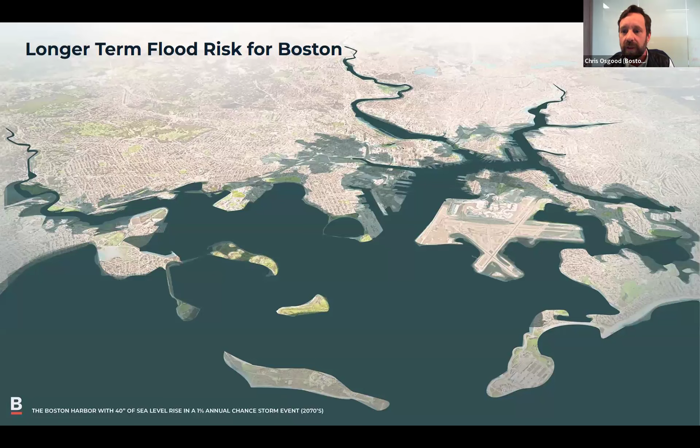As we are collectively doing this work to reduce the risk of coastal flooding, we are very focused not just on walling ourselves off from the community, which is what we do not want to do. We want to reduce that risk, but really think about how we continue to enhance public access to that shoreline, how we make sure that this wonderful shared asset of our harbor is something we can continue to bring people even closer to as we reduce the risk of coastal flooding in the future. And as we build along that coastline, we are not just enhancing public access, but also making sure we're continuing to invest in the ecology of the harbor itself. It's that triple bottom line around reducing risk, improving public access, and improving the ecology of Boston which is really the focus of our work.

That work is really done with three different strategies that are happening at the same time, but have different timelines associated with them.

The first is really focused on today's storms. We want to make sure that we, as a city, are protecting and supporting our residents around preparedness for all hazards, including around coastal flooding. This is work which is really being led by our Office of Emergency Management. We last year hired a new chief of the Office of Emergency Management, Adrian Jordan, with an expanded focus much more on the climate hazards in front of us.

This past September, with credit to Nayeli and the Office of Emergency Management, we ran what we believe was a first-in-the-nation Deployables Day, a one-day training event for the folks who have deployable flood walls to put them up in advance of the winter season, which is when we typically have seen our most extreme coastal flooding events here in Boston. We are now looking at other interim flood measures in our city as we do some of the longer-term changes to our coastline.

The Office of Emergency Management will be updating its natural hazard mitigation plan over the course of this year, and there'll be a number of public conversations about that. We encourage you to get involved in that process. Most of what I'm going to be talking about in the next couple of slides, though, really focuses on the second and third strategies you see on this screen.

These are the strategies focused on the transformation of Boston's shoreline to lower longer-term flood risk here in our city. The first set of work is really focused on the places where we are experiencing flooding today, where we would expect to see significant flooding later in this decade or early in the 2030s. This is a place where the mayor has invested more of the city's capital budget than at any other time in Boston's history, in work to enhance that coastline and protect Boston residents. I'll go through some of what those projects are.

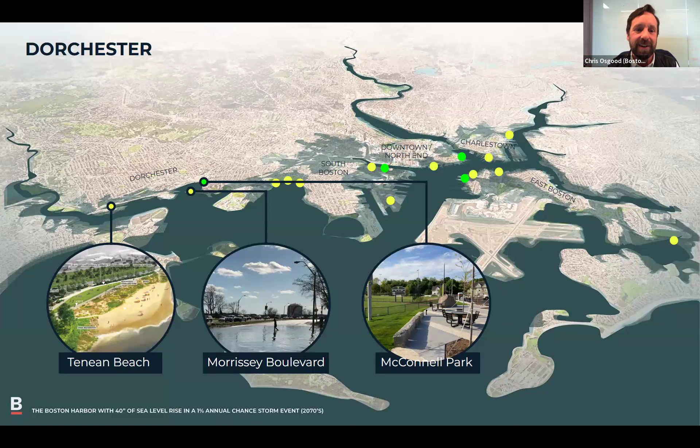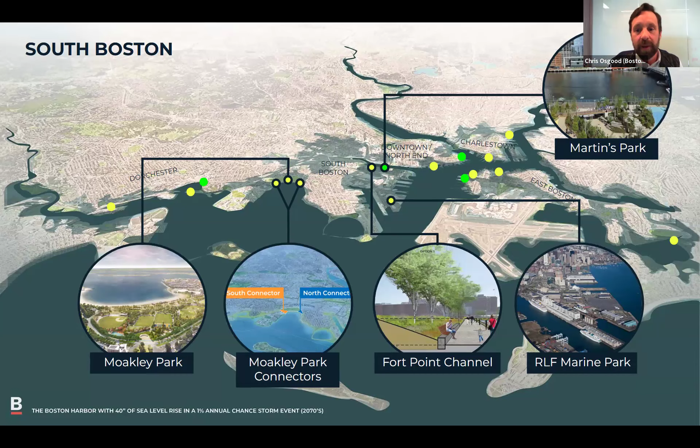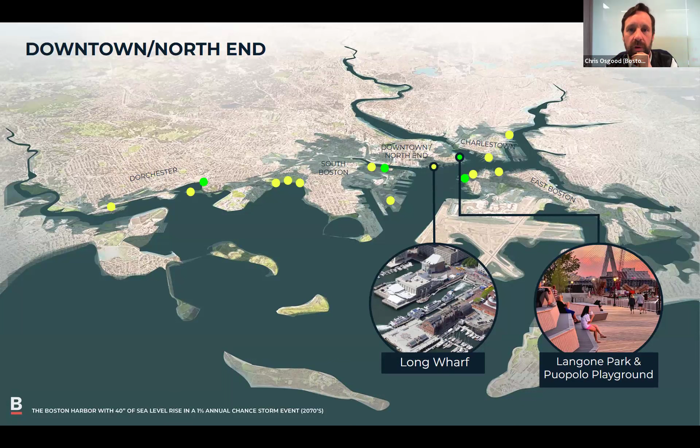That terrace seating is a beautiful place to sit on any sunny day, and it also serves, in particular on stormy days, as flood resilience protection for the North End neighborhood. Mike, Sarah and Rob will talk more about the project just around the corner, around the New Charles River Dam, a really critical project for the city, the Commonwealth, and every stakeholder across this region.

Moving quickly to Charlestown, the city of Boston is shortly kicking off, through its planning department, an advanced study around the Charlestown Navy Yard. This is the area adjacent to the National Park Service site, where we are working with property owners there and along the Little Mystic Channel to think about what district-scale solutions might look like, solutions that will help reduce the likelihood of inland flooding in the city of Boston, as well as guidance around retrofits to some buildings where that may be appropriate.

The second project focused here is one that broke ground in December: a $25 million reconstruction of Ryan Playground, a beautiful playground at the northern end of Charlestown. This is one of two parcels where the city needs to do work to close a significant flood path that, left unaddressed, would allow flooding into the Sullivan Square area and into parts of Somerville and Cambridge. We've been very excited to move this project forward with support through the city's budget.

Just to close out our quick run-through of some ongoing work the city is doing in East Boston, with credit to Massport: Piers Park 2 was recently completed, providing a degree of elevation in connection with Piers Park 1 that helps address some near-term and long-term flood risks there.

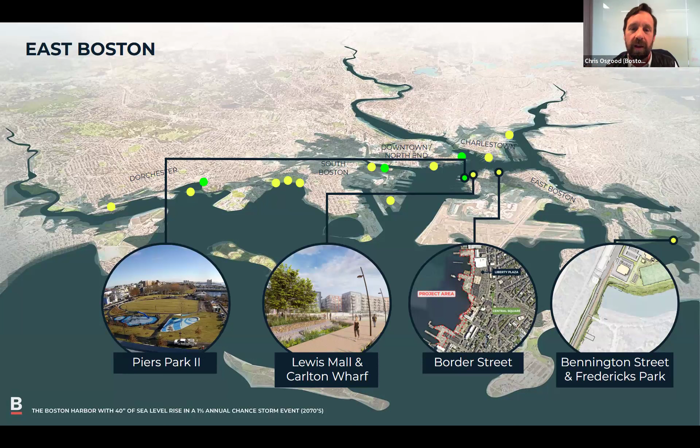The third project is at Bennington Street and Fredericks Park, which we're doing in collaboration with Revere. Across those last three projects, you get a sense of the nature of these projects and, to some degree, the complexity of each. Looking at Bennington Street, Border Street, and Lewis Mall/Carlton Wharf, all three are in East Boston, all protecting very critical residential, commercial, and infrastructure assets. But they need to be done in slightly different ways.

The project at Bennington Street and Fredericks Park has a flood path that cuts across both Boston and Revere. So this project is being done in coordination between those two cities, with the support of a pair of Municipal Vulnerability Preparedness grants from the Commonwealth.

Border Street is a project being done across 7 private property owners, where the city of Boston is stepping in and leading a coordinated planning effort across those property owners, even though there is no public land in this area, to make sure we are designing and implementing a resilience strategy that protects not only those properties, but all the properties behind them from the flood risk in front of us. Lewis Mall and Carlton Wharf is a project being done in collaboration between the city of Boston and Massport. Three projects, three different partnerships necessary to move them forward.

The context for these projects is also very different. The Bennington Street project is right adjacent to DCR's Belle Isle Marsh, one of the beautiful salt marshes in Greater Boston Harbor. The Border Street project is happening within a designated port area, and Lewis Mall and Carlton Wharf is a project really focused on the existing harbor walk.

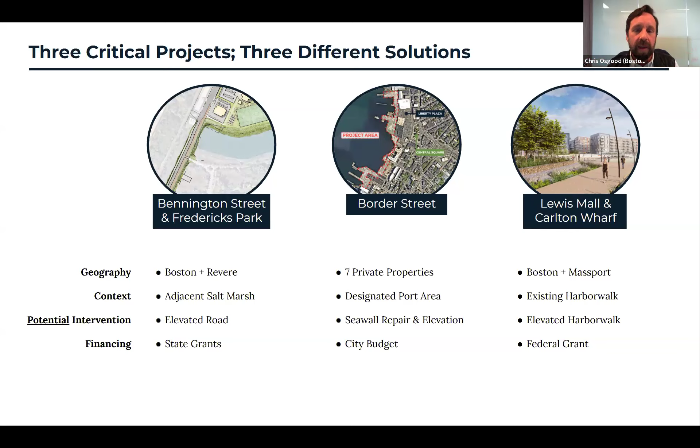And then the financing for each of these projects is also quite different. Bennington Street and Fredericks Park has been advanced through state grants, Border Street through city funding, and Lewis Mall and Carlton Wharf through a combination of funding, but most recently with the federal grant we've received. I wanted to give a sense of this complexity because it speaks to the nature of the collaboration that is already happening and that's going to be necessary to make all of this work move forward here in Boston and across the Commonwealth.

Before turning it over to Rebecca and then over to Mike and Julie, I wanted to briefly touch on one last thing: the U.S. Army Corps process in front of us. The U.S. Army Corps is one of the most significant federal partners we have in addressing some of the long-term flood risks that Boston experiences. The way you formally partner with the U.S. Army Corps of Engineers is through a coastal storm risk management study.

That study culminates in the spring of 2028 with a report submitted to Congress. In that report are a set of recommended design interventions, recommended capital projects to lower the flood risk for our city. The first versions of those projects are going to be publicly presented over the course of this year.

So in thinking about ways this broader group can stay engaged in this process, particularly in the Army Corps work as well as each of the projects I highlighted, is a really important next step. To plug into the work along the Army Corps and into our nearer-term capital projects, I encourage people to go visit boston.gov/climate resilience. I can put that information in the chat. You can find out more about each of these projects and about how to get engaged.

We know that we're going to be able to address the risk in front of us through the collaboration present on this call, whether it is around getting the designs right, thinking about how to do the financing, or making sure we are not just designing great projects, but building and maintaining them for the success of our city and region for generations to come. So I look forward to your questions, the additional presentations, and thank you so much for everybody's focus on this really critical effort.

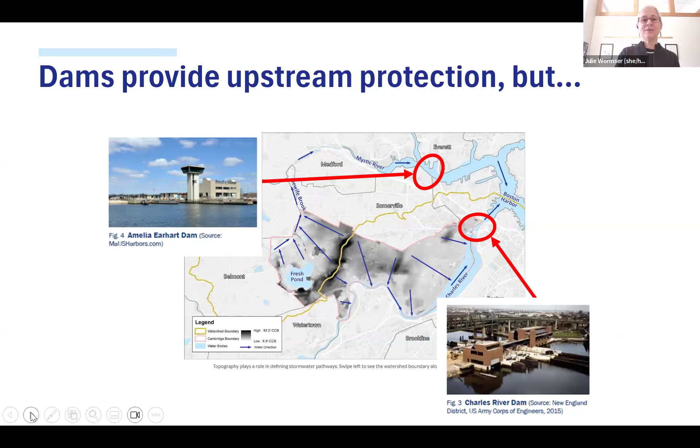So they protect us now, but we're getting closer and closer. We've had a couple pretty major storms that came within a couple feet of the top of the dam.

By mid-century, both dams are expected to flank, with water going around the dam and also going over the top. I'll leave it to Mike to talk about what they're doing on the dam, but it's fair to say we're getting to chin level in terms of those dams protecting upstream from saltwater flooding. As you can see, that lower level is mid-tide, which is what DCR manages the rivers at.

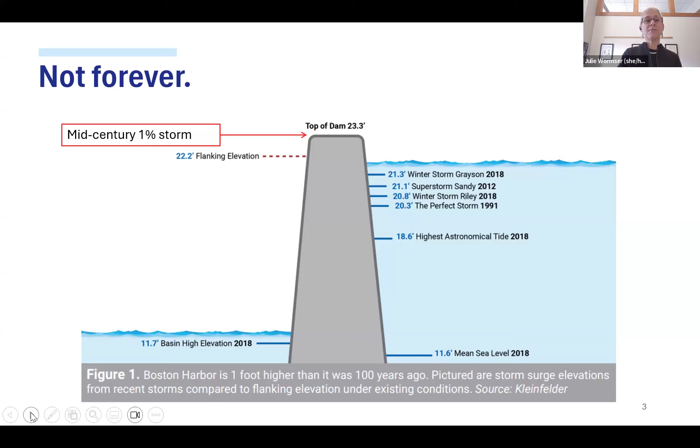Saltwater flooding is so corrosive that it's not something you want as a constant. Above the dam, we'd expect overtopping at least every couple of years, and upstream enough for every 5 to 20 years. Again, saltwater flooding isn't something you want over time, especially when you're not a salt marsh.

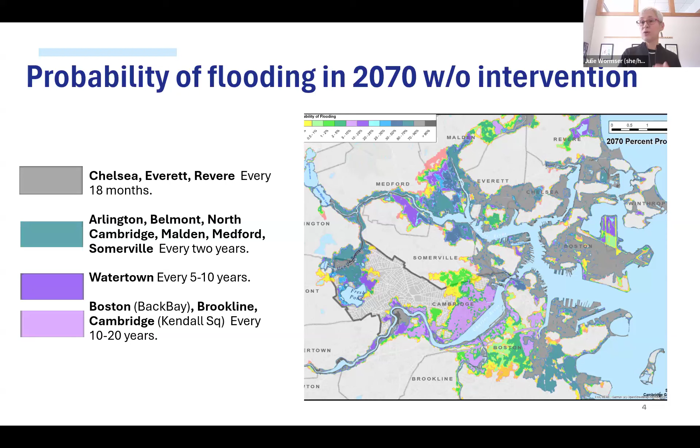So 7 years ago, I was one of the folks who reached out to 50 thought leaders in the Mystic River watershed and said, help us understand what your biggest climate challenges are. Folks over and over said they were really worried about the impact of the Amelia Earhart Dam on the Mystic River - either intense rain not being able to get downstream, or coastal flooding not getting upstream.

So all 21 communities in that watershed reached out to DCR and then Governor Baker and said, we're worried about the dam. The first thought was the pump, but beyond that, it turned out that the more important thing was to actually elevate the dam.

Soon after that letter, this 20-community group got together with DCR and the engineers working on both the dam itself and concerns about upstream and downstream flooding.

All of this purple is the amount of saltwater flooding all the way into Cambridge's Fresh Pond, all the way up to the Watertown Dam, and all the way up into Malden. This is what we expect to happen with 5 more feet of ocean between sea level rise and increased storms. We've been working together since 2019 to understand the best interventions and how much of that flooding we can manage.

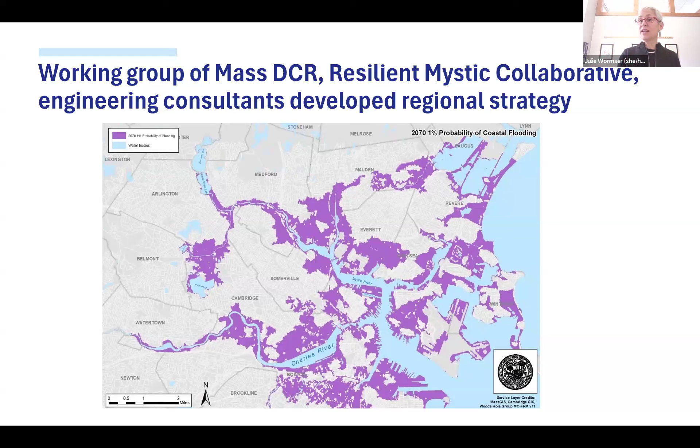As Chris has been talking about the Boston waterfront, this has really been the flooding associated with the dams. What we realized is that with essentially 9 interventions, some the same ones Chris mentioned, all of that purple could turn to green - meaning high and dry during a 1 in 100 chance storm in 2070, which is again about 5 feet higher as a projection from our 1 in 100 storm today.

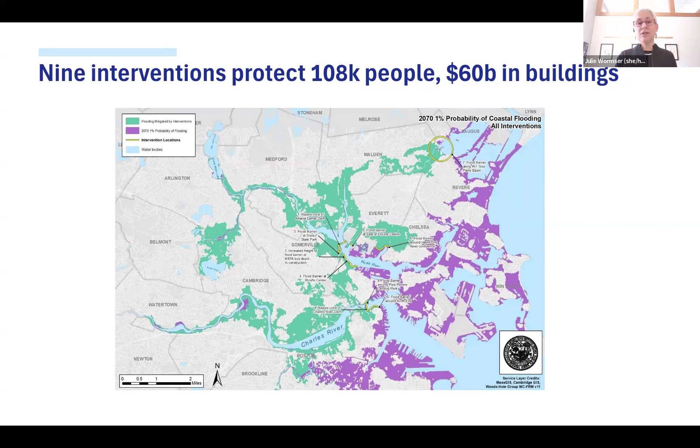That was modeling done predominantly through DCR and Cambridge on behalf of all the upstream communities. This first modeling said, here's this Sharpie-equivalent of modeling to show where we could cut off flood pathways, and what is needed. There are multiple flood pathways in the Mystic watershed - all but 2 of them, and the most important ones, are publicly owned.

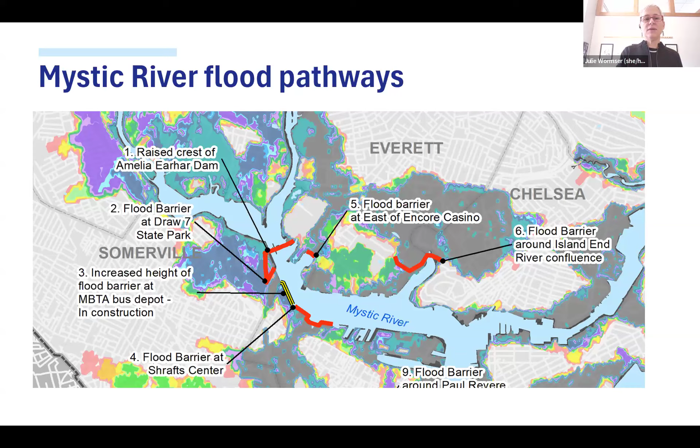And we're really far along in progress to date. Skipping the dam itself, but we've gotten a lot of funding for it. Draw 7 Park is right next to the dam - that's fully funded and permitted with construction underway.

The Island End River project - we're worried about our FEMA grant, but it's had initial approval. That's the largest grant ever under the Building Resilient Infrastructure and Communities program in all of New England. So we're hoping that is still coming.

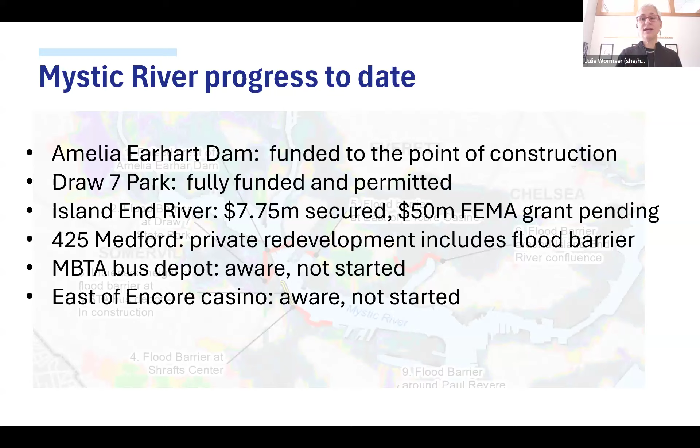And then there are 2 private redevelopments where they're aware of the concern. 425 Medford is elevating the shoreline in a beautiful way that keeps access to the river - that's part of their design. And the bus depot and the casino, they know the issue, but haven't started on that concern yet. All underway though.

In the Charles River, it's really the Charles River Dam and surrounding areas. And as Chris mentioned, those are already starting to be elevated.

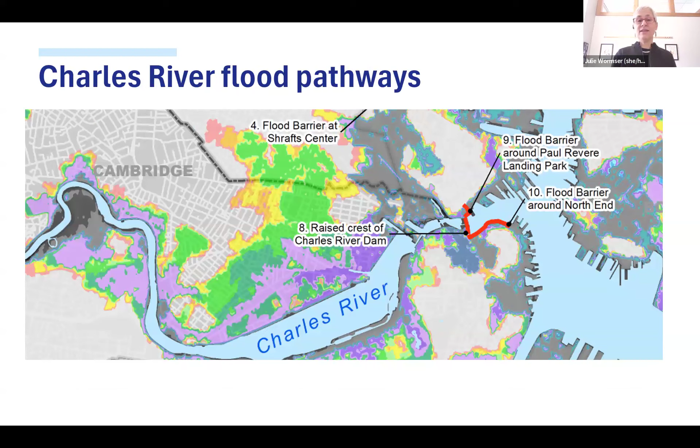So the dam is under Army Corps study, and the rest of the parks, the waterfront parks, Boston and DCR, will be part of community engagement. We're not ready to rebuild parks or seek funding for them, but we do have some funding available for community engagement in terms of what people want to see happen when the shoreline is elevated.

Beyond the progress we've made on a site basis, we were able to get $1 million through a congressional earmark. What we're doing now is a regional engineering study to go from that Sharpie marker of where the flood pathways are to really understanding at a ground level what it will take, how expensive it will be, and what opportunities there are for co-benefits for all the pieces required to elevate the shoreline to protect inland neighborhoods for 5 more feet of sea level rise.

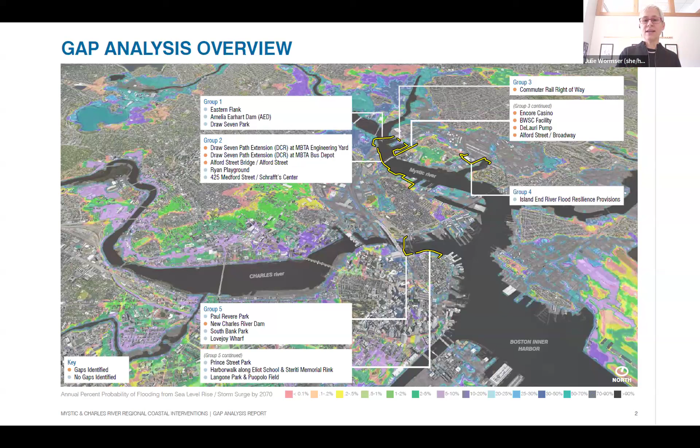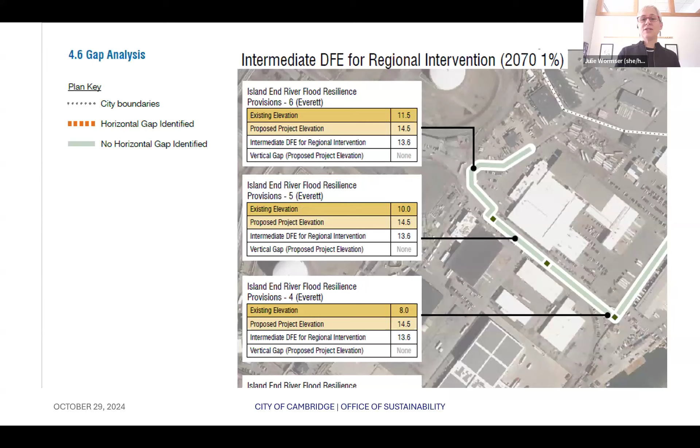Weston and Sampson is finishing up that work, but this is what that kind of report looks like. I'm just going to zoom in - can you guys see that? So when you're looking at this, here's the existing elevation, this is what the project is designed to do, and this is what we project as a very fine point, not a broad brushstroke, but site-specific based on wind and waves, etc. This is what we expect in terms of flooding. So there's no gap - you guys are good to go.

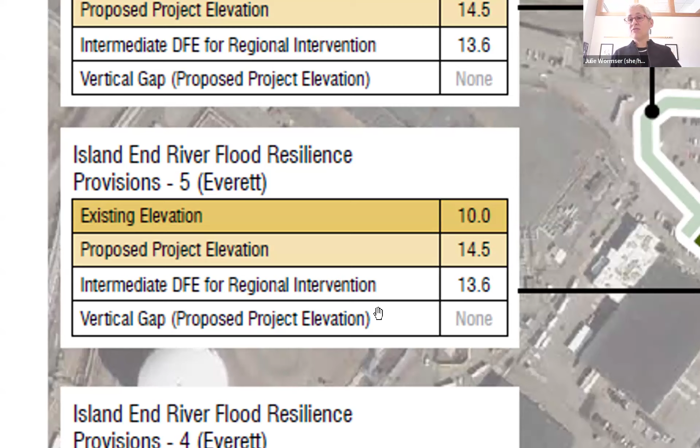And so there's some situations where we say, actually, what you're proposing to do is a little short of what we think you'll get for flooding. So if you're still in early design, you might want to either have another strategy or elevate what you're doing.

So I think that is it for me. But this has been an extraordinary effort, both in terms of the multiple municipalities, multiple nonprofits, multiple engineering firms, and the state and federal government. Because again, multiple communities and a very long-term project that, including the dams, is probably $500 million total once we are good to go. But very exciting, and many, many people to thank.

So I will stop there and give it to Mike and Rebecca.

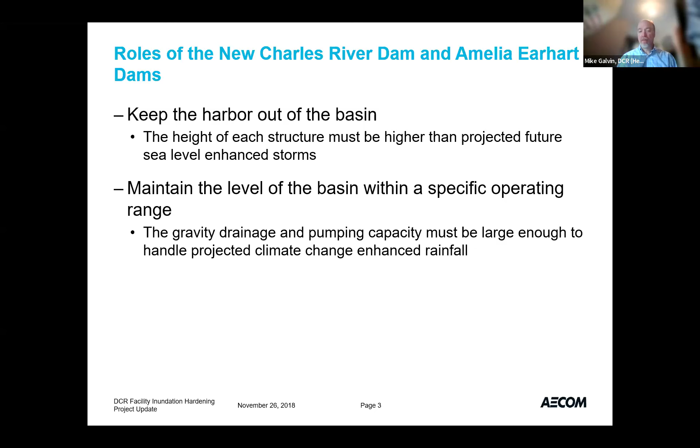Now, as Julie mentioned, we really had been focusing on what they call the 1% storm of 2070. So you have sea level rise, which is obviously making our job a lot harder to maintain that basin level, and will make it much harder once we get overtopped. And usually with a coastal storm, you design a project to withstand a 1% storm, a storm that has a 1% chance of happening in any given year.

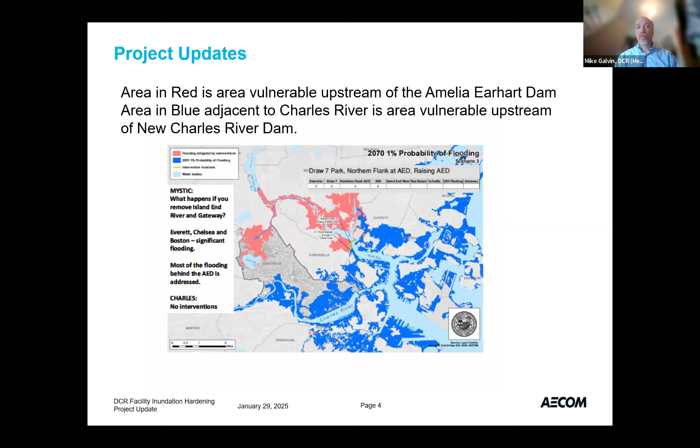And as all the models were showing us, and especially the Boston Harbor Flood Risk Model and the Massachusetts Coastal Flood Risk Model, which was built with the help of Woods Hole Group...

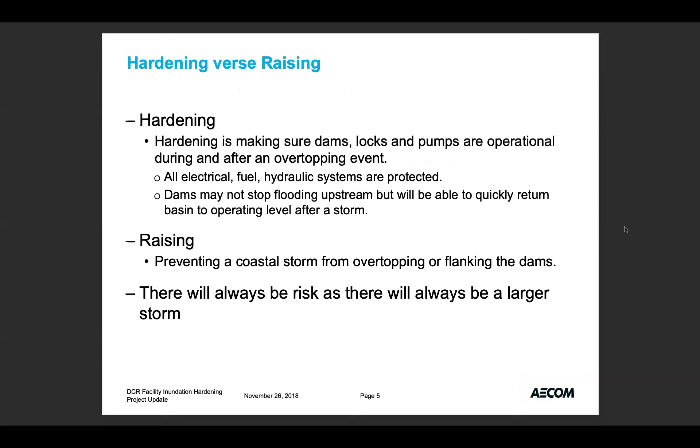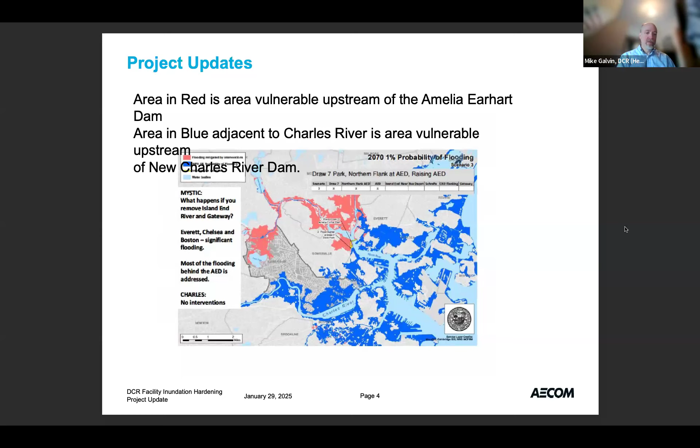All right, well as Julie mentioned, she showed the same graphic that was actually developed by the city of Cambridge. The area in red is the area that's protected by the Amelia Earhart Dam around the Mystic River, and the blue area around the Charles River is what's protected by the new Charles River Dam. So, you can go to the next slide.

So as we looked at the dams, there are two, in order. The dams can protect from the initial flooding, but they also, even if they're overtopped and the flooding happens, have an extremely important role in helping with any recovery. So we focused first on hardening so that the dams themselves would be able to still be operational after they were overtopped. The reason why we did this is we knew we could move a lot quicker in getting the hardening projects out, and continue that role into the future while we continued to work on design for the raising, which we knew was going to take a lot longer time.

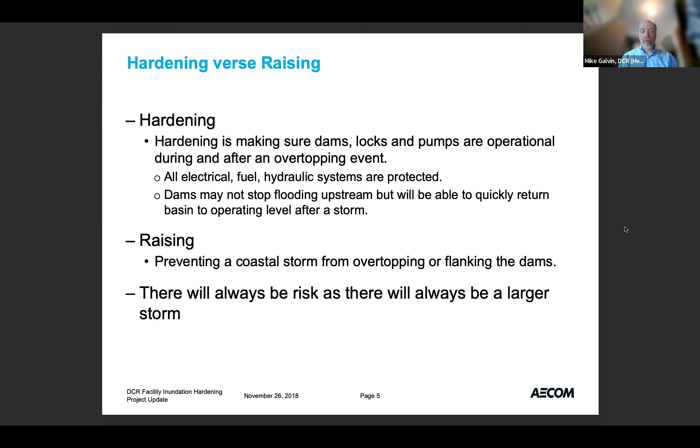And also, we know that we're designing the raising for either the 1% or the 0.2% storm - there will always be a larger storm. In the future, even if they get overtopped, we wanted those dams to always be operational so that they could help with recovery. So, next slide.

So in the phase 1 hardening projects, we looked at the New Charles River Dam first. It was actually a little bit easier to harden than the Amelia Earhart Dam. We went through the process with the Corps and put that forward. Then in phase 2, we already had a Draw 7 project that was mostly a park project, and we were able to modify that project to help with the raising of the Amelia, because there's a flanking area through the Draw 7 area.

And we're continuing with a dam raise study for the Amelia to figure out how we're going to raise the entire dam. So, going to the next slide.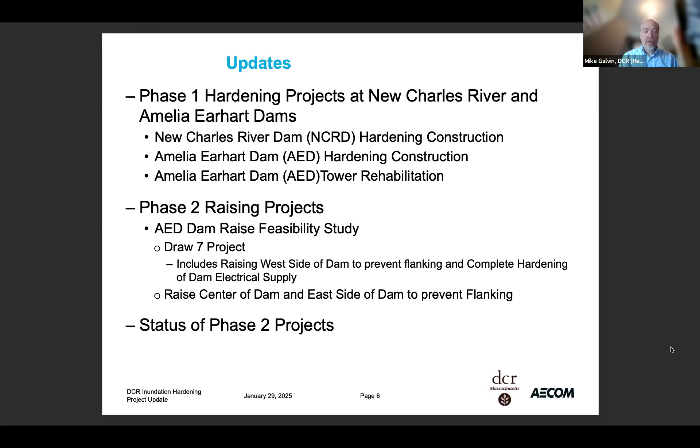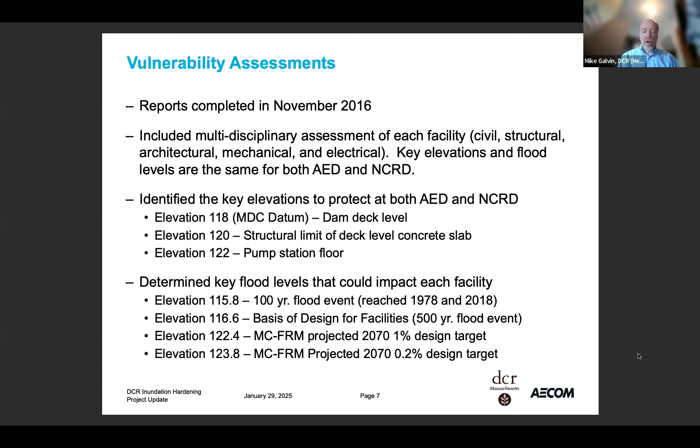We started in 2016 with a vulnerability assessment to target how we're going to harden the dams. We looked at critical elevations at the dams. Both were built with the same design elevations in mind, with deck level at MDC datum of 118. MDC datum zero equals NAVD minus 106.4, so subtract 106.4 from any elevation to convert. We had the dam deck level, the structural limit of the concrete slabs, and the pump station floors as key elevations, then looked at those elevations against different floods to determine where we could harden relatively easily.

We started with the New Charles River Dam and designed the hardening project. We wanted to make sure all the electrical and hydraulic systems would be operational after a flood came over the top. That project was completed in 2022.

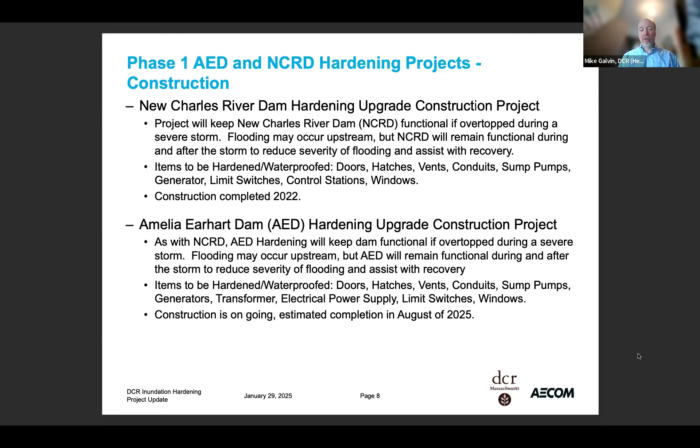The Amelia Earhart Dam project was a little more difficult—the locks are 15 years older than the New Charles River Dam, making it a harder project. We're still in construction now and expect to complete the hardening this summer. We also looked at what it would take to replace the Amelia Earhart Dam, and that number was in the hundreds of millions, 800 million to 1 billion, to completely replace it. So we knew maintaining these dams, even at their age, was a much more economical solution.

Another aspect of the hardening is rehabbing the Amelia Earhart Dam tower. This construction project addresses a tower that hasn't been operational for 20 years. Right now the lock controls are on the deck of the dam, so we need to rehab the tower to move those controls solely there and off the deck, so the deck can be overtopped. That project has just been awarded and is supposed to be completed in 20 months.

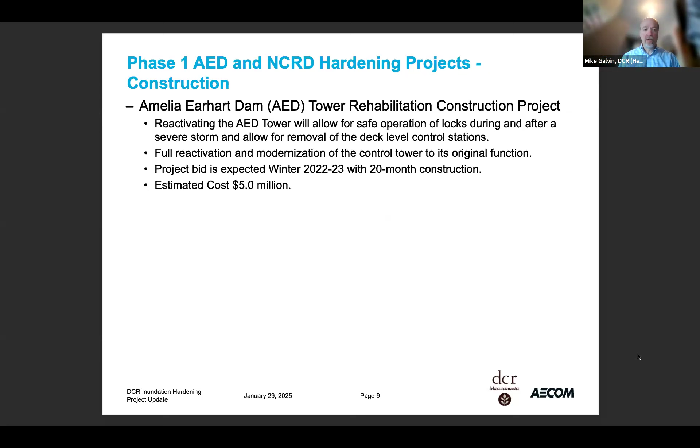For phase 2, we're going to protect the areas of the Charles River and the Mystic River upstream, raising the dam to at least handle the 1% storm, and hopefully higher as we go through design. We did an initial study of the Amelia Earhart Dam looking at three elevations—120, 122, and 125 feet. There's a big jump in economics going from 122 to 125. We had been focusing on 122, but now, going through design, we're looking a bit higher, as the design target is now the 500-year storm for 2070.

Draw 7, as I mentioned, is on the west flank of the dam, and it would flank well before the dam overtops. We took this project and added a flood control aspect to it, raising it to elevation 122. This will allow us to stop flanking while we finish designing the dam itself.

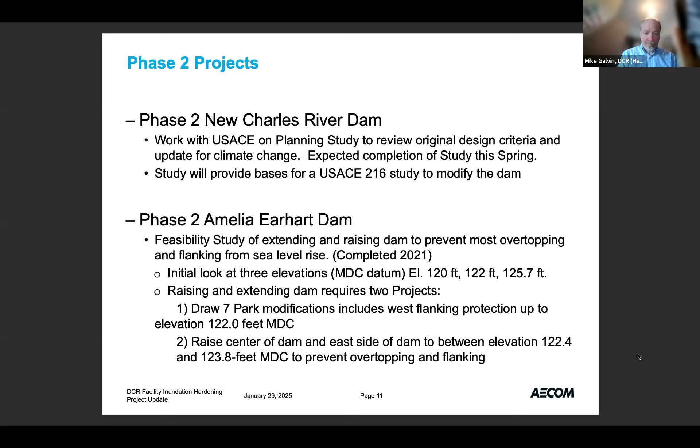Right now the estimate for raising the dam itself—we're in the initial stages of design—is about 30 million. Draw 7 Park is awarded at 13.375 million, and we expect the east flank to cost about 3 to 4 million. Compared to replacing the dam, it's a lot more economic.

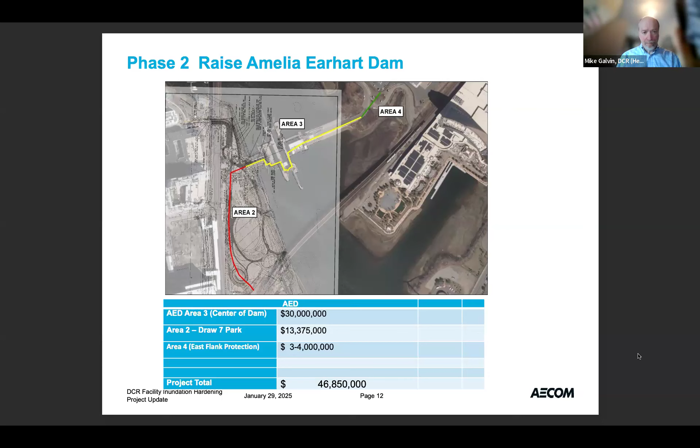Draw 7 Park has been awarded and construction has started. The east flank project design is being finalized—we're just waiting on the easement. For raising the dam, we're going through a detailed analysis, looking at all failure modes and reanalyzing what level we can go to. A lot of the challenges involve how we modify the locks, the sector gates, and the face of the pump station. There's a lot of work to be done, and we hope to be in permitting by next year.

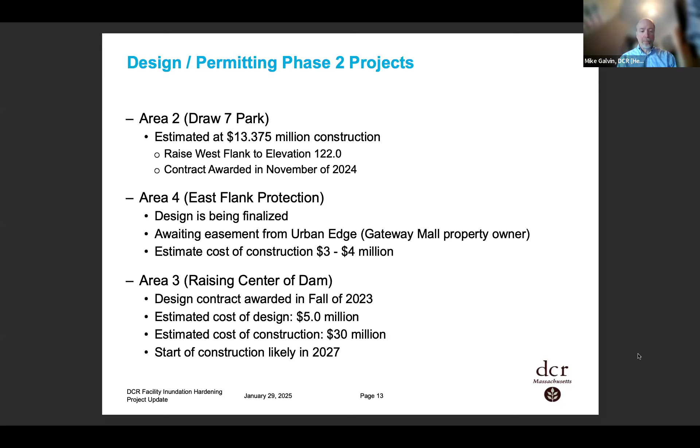On the Charles River Dam, as I mentioned before, the U.S. Army Corps of Engineers built it as a federal project, so we're in the first stage with them. We started a planning study to have the Corps look at remodeling the dam from its original design scope, taking into account climate change, increased rainfall, sea level rise, and going forward. That study is scheduled to be complete this spring, and we expect them to come out with a report.

That report will help launch us into what's called a 216 study with the Corps. A 216 study is necessary when dealing with a federal project, and once authorized on the president's plan to go forward, they will study the dam, determine solutions, and perform the cost benefit analysis. In order for the Corps to cost share with us, they have to have a positive cost benefit analysis through their system. So we'll finish the planning study and then move into the 216.

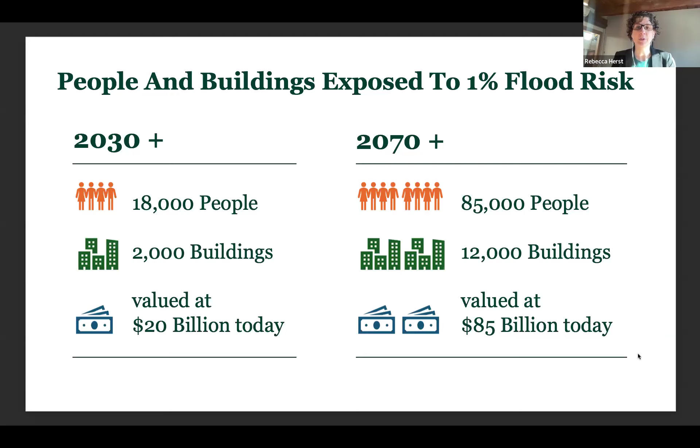We know that there's a huge risk to Boston. We've just seen a lot of these slides, but to ground it, it's billions of dollars, thousands of people, thousands of buildings, and it just increases over time. So there's a lot of urgency to moving this work forward.

We are looking to develop a place-based opportunity study. We're calling it an opportunity study instead of a case study, because case studies are retrospective, and this is really looking forward at two neighborhoods in Boston. We're going to look at the Wharf District and North End, some of the commercial part of downtown, and also Border Street in East Boston. Between these two areas, we think it will be about $1 billion worth of investments necessary.

We're going to be looking at developing specific recommendations for a mix of private, city, state, and federal sources. The hope is that this will help establish a broader framework for funding and financing decisions for the rest of Boston's waterfront. The investments needed for the whole coastline are between 4 and 10 billion, so there's a lot of investment needed, and we really need to develop a strategy to move forward.

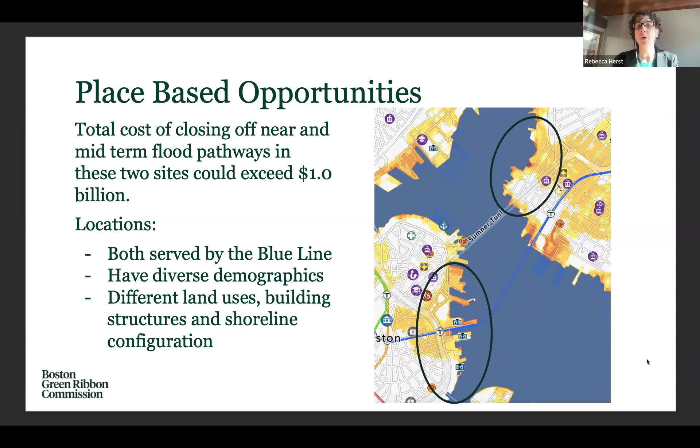So we're going to be looking at a section of downtown and a section of East Boston. The reason we're looking at these two areas is that they have pretty far along plans that are very specific, so we can think about how we actually pay for these proposed interventions. They're also really connected—both served by the Blue Line, with really diverse demographics and different land uses and typologies. Between them, we hope that will give us a good sense of what will be needed along the whole Boston coast.

We're trying to understand what different funding sources we can draw on, what the gaps are, what examples we can use to develop new tools for climate finance governance, and how we make sure these investment benefits are equitably and fairly distributed. These are big questions, and we think that by looking at these two very different neighborhoods, that will help illuminate some of them.

So we're going to build on our past work. This includes all of the work that all of our panelists have been talking about, and the Climate Ready Boston work. We'll engage stakeholders through a steering committee and have additional targeted conversations with people. And then we really want to develop a financial strategy and governance recommendations with regards to fairness and equity, and understand how we can move these things forward in a way that allows everybody to thrive in Boston.

So we expect this to be between a 12 and 15-month project overall. We're currently in the fundraising stage, but in the short term we are looking for background research on the different opportunities and challenges and identifying primary funding and financing tools. Then we'll go into much more detailed strategies for implementation for these specific neighborhoods and the specific proposed interventions that they are interested in moving forward.

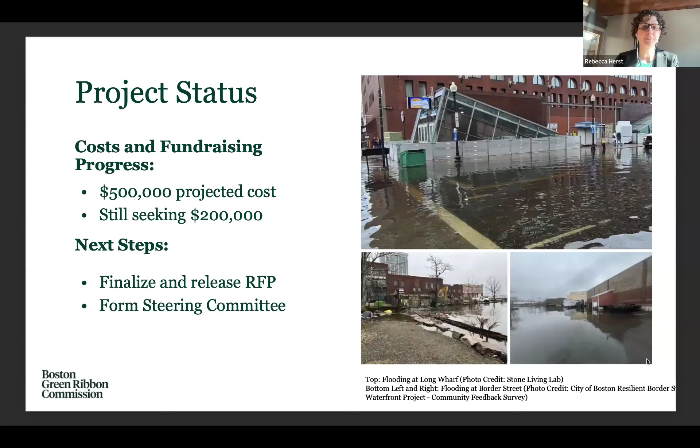So as I said, we're in the fundraising stage. We think this is about a $500,000 cost project, and we're still seeking $200,000. So if any of you are interested in contributing, please follow up. This will be a really helpful project for the city as a whole. Once we have secured our funding, we'll finalize and release the RFP, form the steering committee, and get going. So that's it.

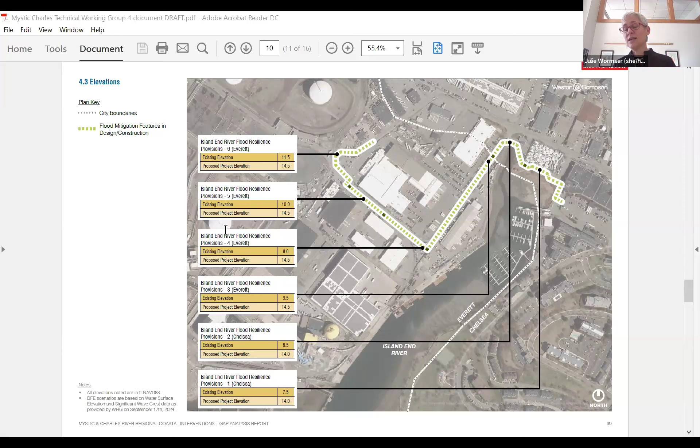My belief is that this project, which Chelsea and Everett have been working on since about 2017, is through permitting - it's certainly through permitting on the Chelsea side, and I believe it's through permitting on the Everett side. Really, it's now about making sure that FEMA grant goes through, and they're working on a major matching state grant. It was a September bill, $750 million that the state appropriated for matching funds for federal grants. Big question about FEMA, still actively lobbying for the rest of the funding, but we're through design and I believe through permitting. So very well on its way, incredibly helpful project, both for our food security and also some environmental justice neighborhoods that would also be affected by inland flooding. If you need more than that, it's not me, but I can steer you towards the people who know more.

Great, thanks Julie. One final question: are there plans for coastal risk modeling to include precipitation in addition to storm surge and sea level rise? Cambridge's does - the upriver modeling does include precipitation. Oh, did you just answer this, Chris? I put an answer, but Julie, Mike, Rob - WaterSewer has done some of this. You can find that at the link in the chat, and WaterSewer is doing some additional modeling right now, mostly focused on stormwater. But the caveat is, like when we see that Leominster got 11 inches of rain in 5 hours, it's not the same as sea level rise, where our predictions are pretty good for the next few decades. I think we're in that place of triage of what are the flood-prone, low-lying areas that need to be storm hardened, because we just don't know when we're going to get a dump like that. That's a different experience.

Go ahead, Mike. For the work at the dams, we looked both at the coastal storm alone as well as coastal storm with rainfall. As much as we get - Julie's right, the rainfall update and changing rainfall is a lot. Right now we don't have a good process for predicting future rainfalls as well. So we're taking the rainfall models we have and updating them as much as we can scientifically do. But it's right, I think that's more of a flood protection than prevention for rainfall.